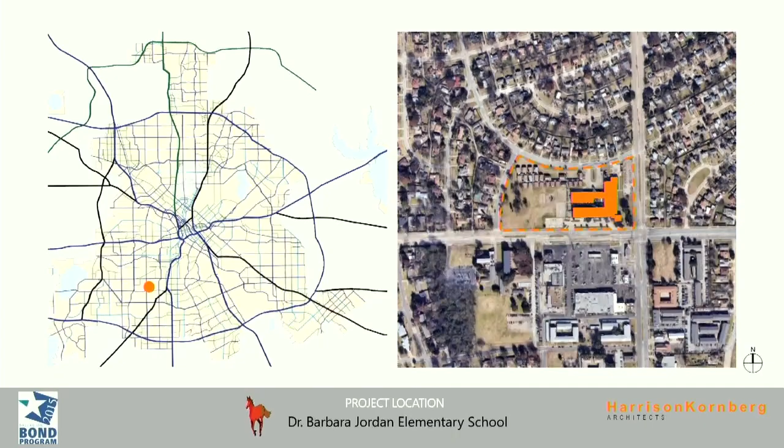For the project scope, we will go over the addition, which will consist of a new administration area and secure entry vestibule, as well as a kitchen expansion, addition, and servery. Renovation work will consist of site work improvements, exterior improvements, replacement of educational casework and teaching surfaces, interior finishes improvements, flooring, replacing ceilings, providing new LED light fixtures, and replacement of MEP systems.

On this slide we're showing an overview of the school floor plan and where the scope is located. Number one, we have the administration addition, located here on your screen. Number two is the kitchen addition, located north of the existing building. Number three shows the extent of the existing building — all that area will be renovated.

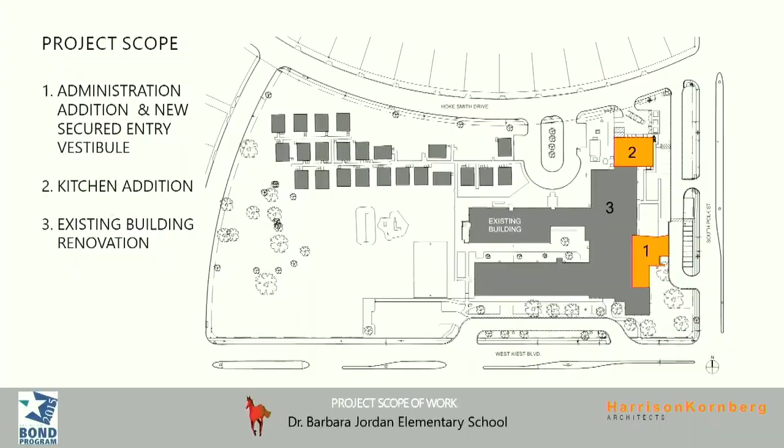Here's a closer look at the floor plan. Number one, as we were looking at before, is the administration addition. Towards the north you can see the kitchen expansion and addition, and the overall square footage of the building and the different spaces.

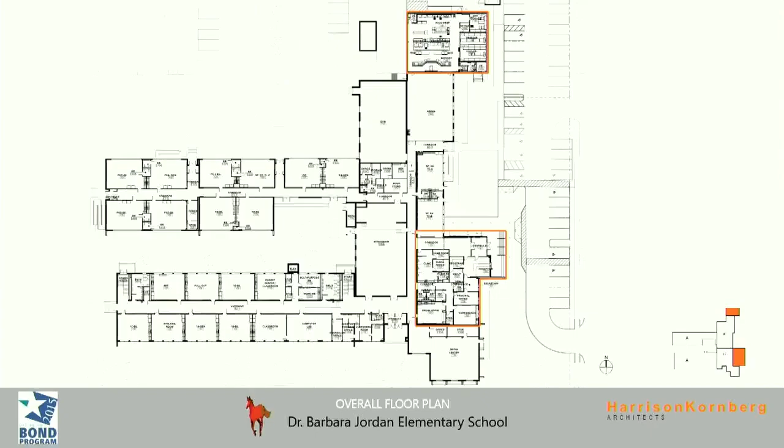For the building renovation, we are including new VCT flooring and new carpet throughout the school area. We're going to break it down a little bit per wing. We have pre-K and kindergarten on this north wing, and we'll be providing new VCT flooring in the cafeteria using the school colors.

For the first grade, first floor, we'll be keeping the school colors as well, with a complementary orange color to provide wayfinding for the kids.

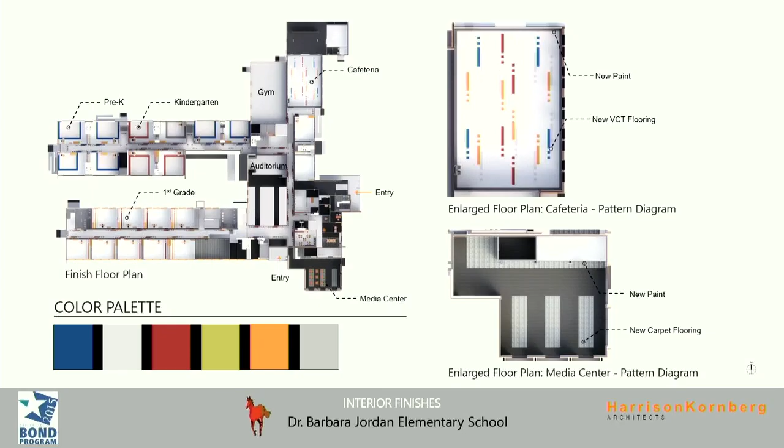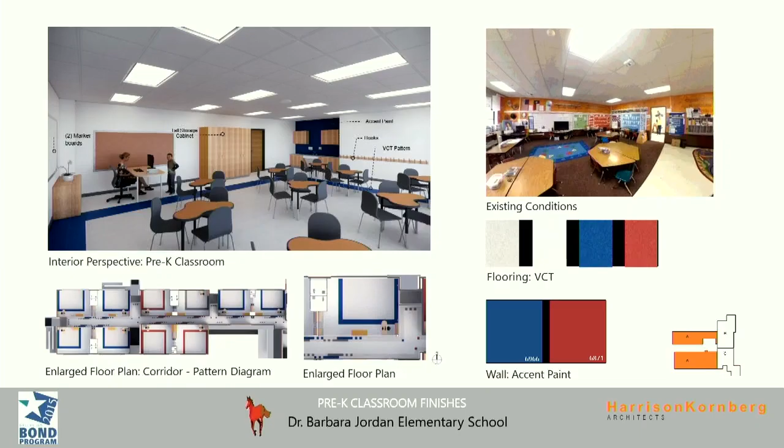Here we can see an enlarged floor plan of a typical classroom. Again, there'll be new millwork, new marker board, new flooring, new ceiling, and LED light fixtures.

Here's another example of that first grade wing, showing how we'll have an accent wall with new finishes, new lighting, and a new marker board.

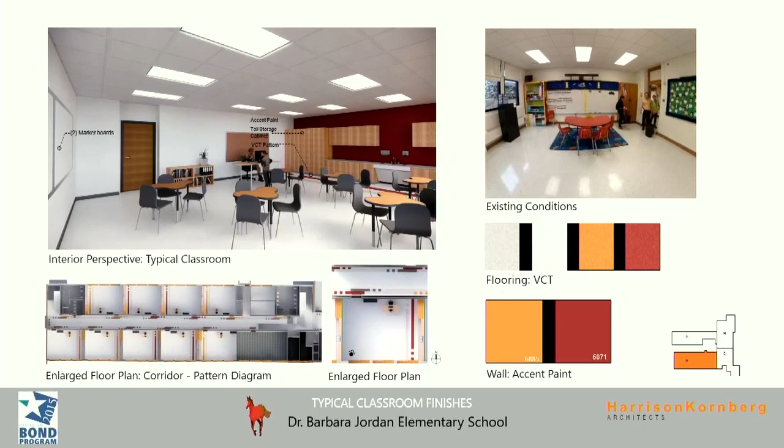Moving forward with the building addition, we're looking at the kitchen area. As you can see, the servery has been expanded to allow for more area, providing an office, dry storage, freezer, cooler, as well as a locker area and restroom for the staff.

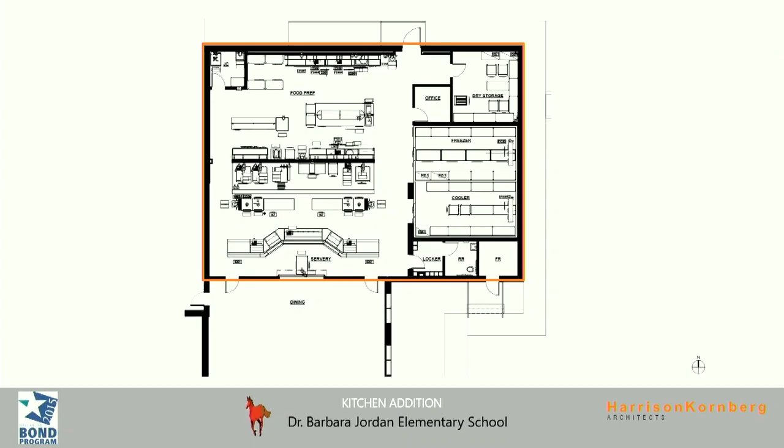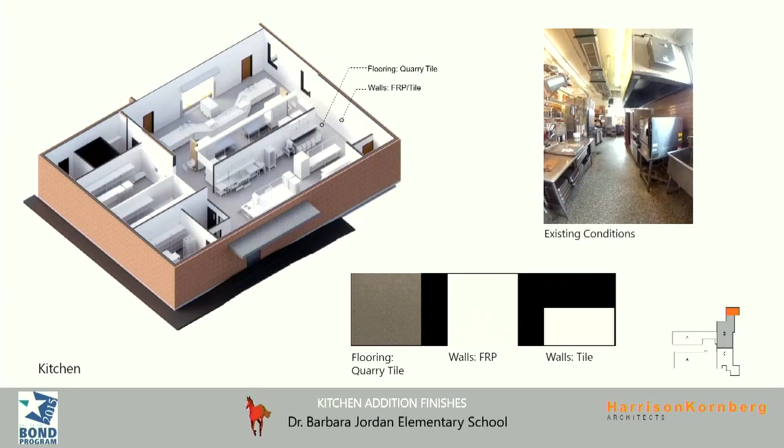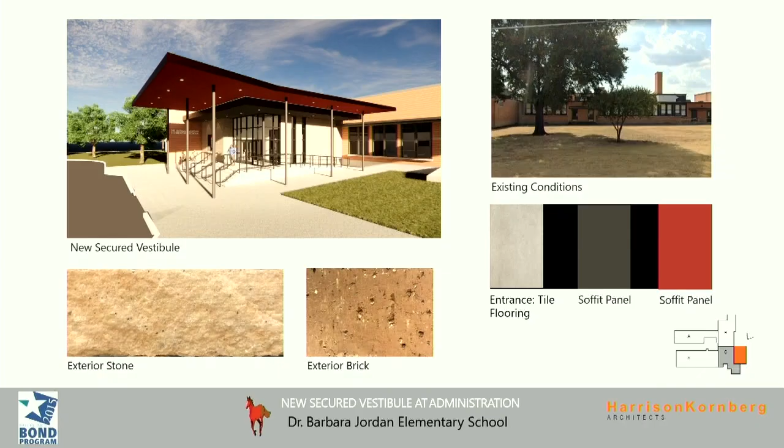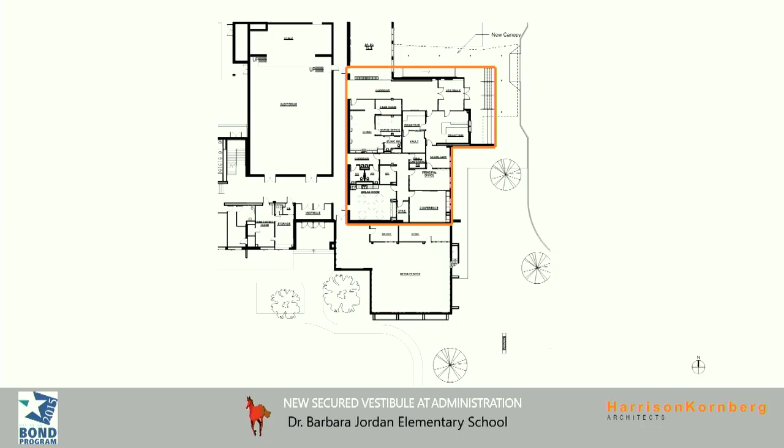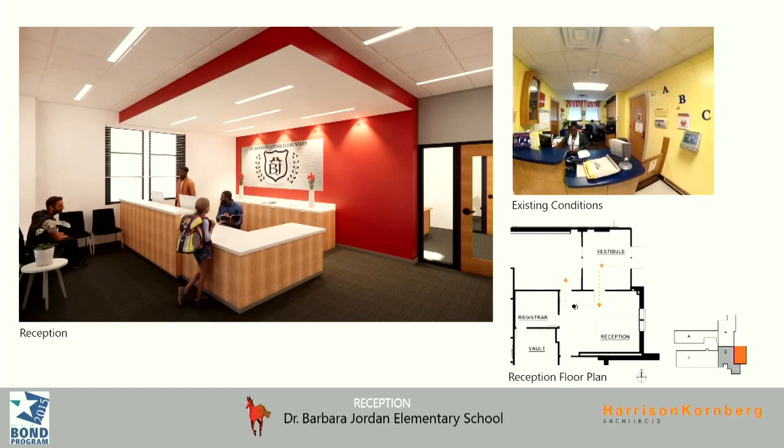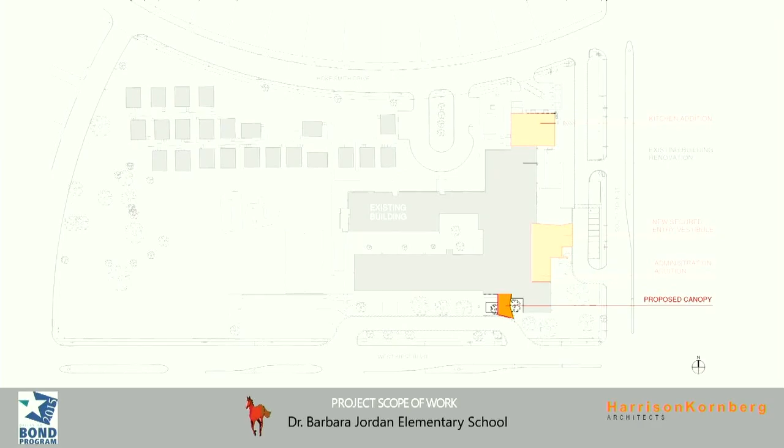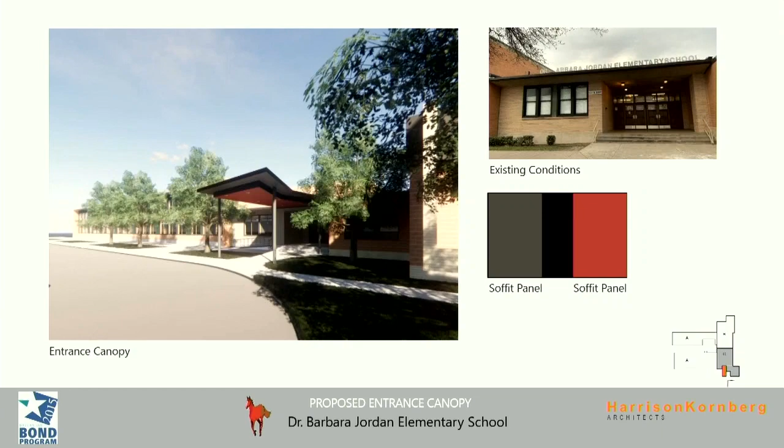And this brings us to an end of our presentation. Thank you so much for your time. And if there's any additional questions, we will be happy to answer those.